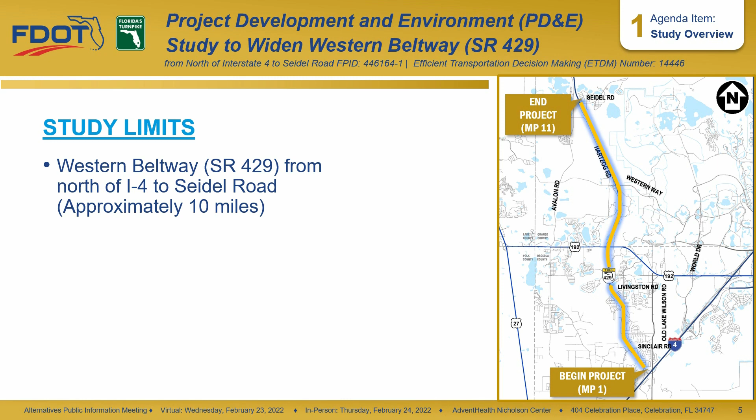The study limits extend from north of Interstate 4, milepost 1, to Seidel Road, milepost 11. The project is located within Osceola and Orange counties.

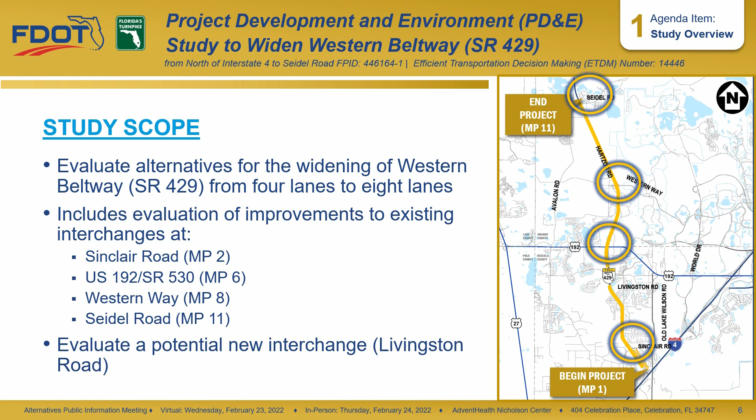The study scope includes evaluation of alternatives for the widening of Western Beltway from 4 lanes to 8 lanes, and evaluation of improvements to existing interchanges at Sinclair Road, US 192, Western Way, and Seidel Road. The study scope also includes evaluation of a potential new interchange, which is proposed at Livingston Road.

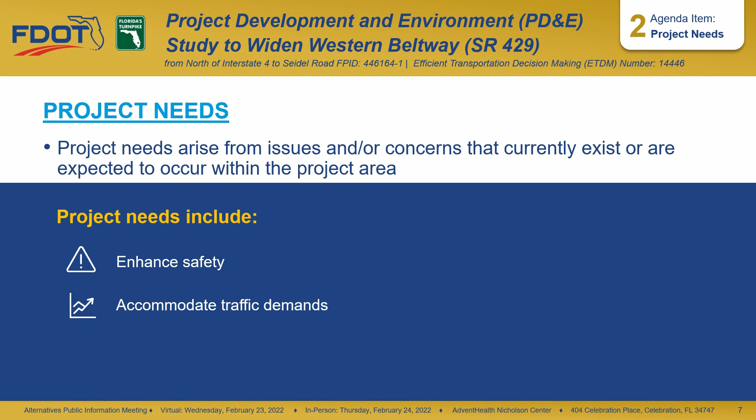Project needs arise from issues and concerns that may frequently slow down traffic, cause delays, or lead to accidents. The need to widen the Western Beltway is based on enhancing safety, accommodating travel demand through the year 2050, improving travel times and reliability, and enhancing economic viability, emergency responsiveness, and evacuation times.

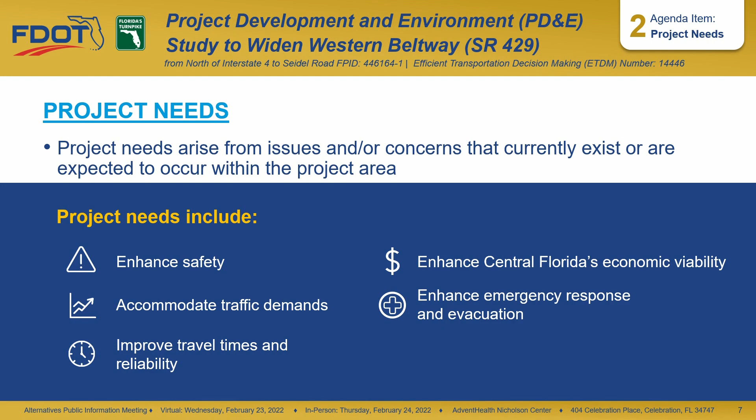Improvements to Western Beltway are needed to enhance safety. Between 2014 and 2018, there were 161 crashes within the study limits between the I-4 ramps and Seidel Road interchanges. The estimated economic crash cost is about $33 million over the 5 years.

Congestion is a major contributing factor to crashes. If nothing is done, congestion will continue to rise, leading to an increase in crashes.

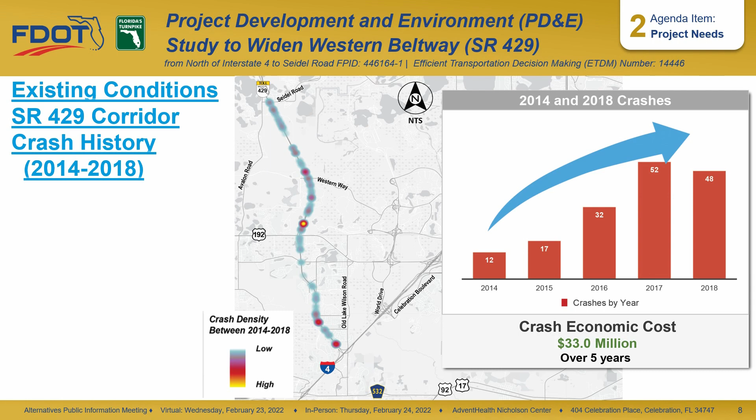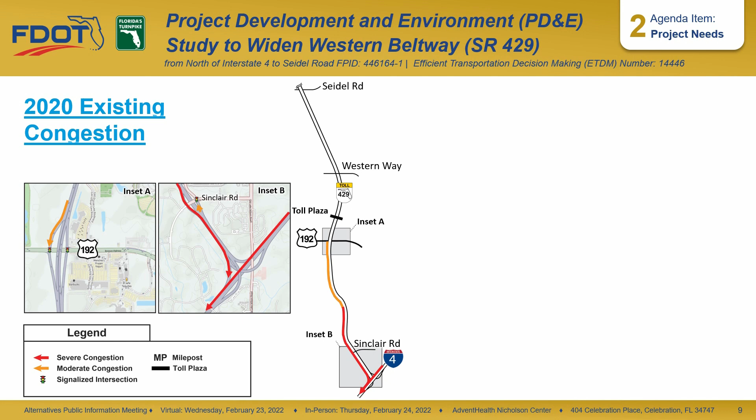The State Road 429 traffic has been increasing by more than 10% per year in the recent past years within the study limits. This can be attributed to the high increase in population and employment opportunities in the area, as well as recreational activities. During the evening commute, traffic backs up on State Road 429 in the southbound direction towards I-4, and long queues have been observed at the State Road 429 southbound off-ramp to US 192.

In order to accommodate future travel demand, 6 lanes are needed by 2030 and 8 lanes will be needed by 2045 for the segment between US 192 and Seidel Road, and between I-4 and US 192 by 2050.

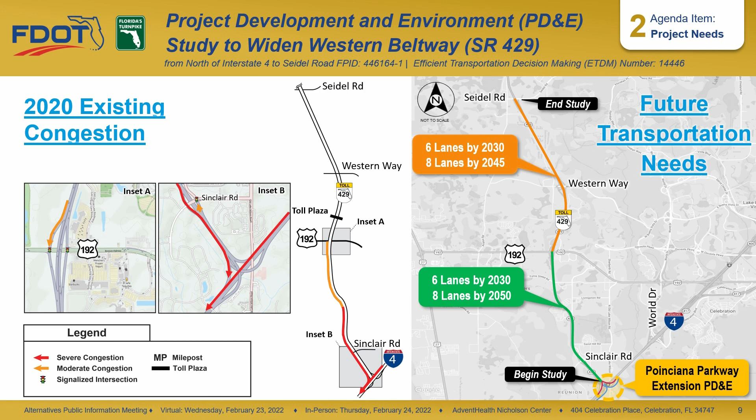The improvements considered as part of this study include both improvements to the main line and to the interchanges within the project limits, and also a planned connection to the Poinciana Parkway extension planned to the south as part of a separate study.

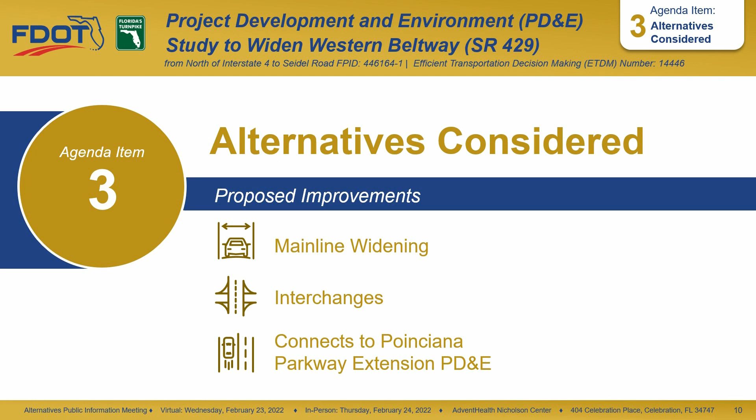In addition to widening the main line, proposed interchange improvements from south to north within the project limits include operational improvements at Sinclair Road, a new interchange at Livingston Road, operational improvements at US 192 and Western Way, and 2 options for interchange improvements at Seidel Road.

The no-build alternative will remain viable throughout the study. We will cover all of these proposed improvements in additional detail.

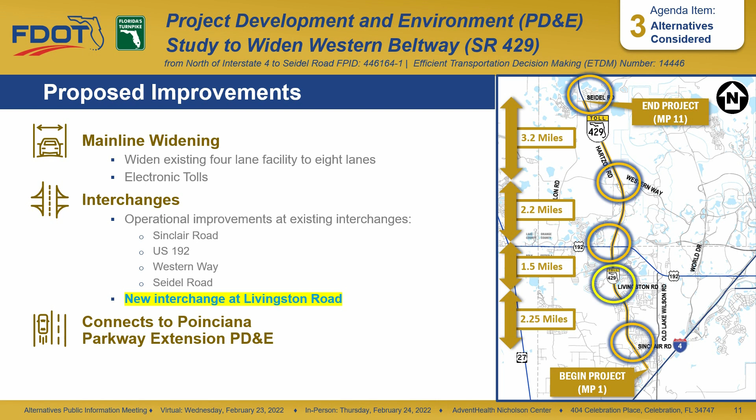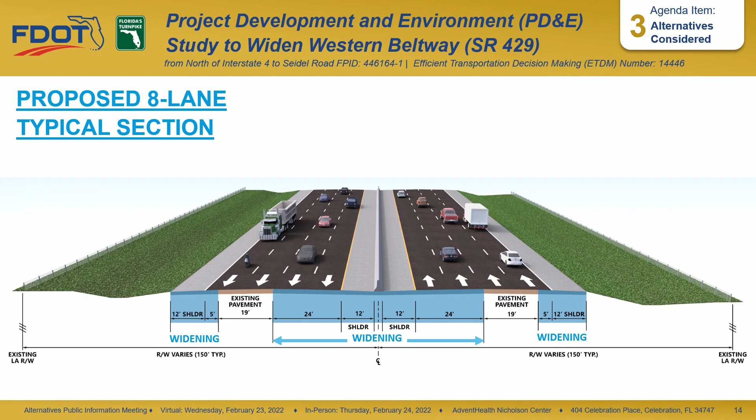Western Beltway will be widened from 4 lanes to 8 lanes throughout the project limits. This graphic shows the existing 4-lane typical section with a 64-foot median. The proposed mainline improvement widens the roadway to both sides. The proposed ultimate 8-lane typical section after widening to both sides includes 4 travel lanes in each direction.

Now, we will cover the interchange improvements from south to north, starting with the existing Sinclair Road interchange 1 mile north of I-4.

This presentation shows aerial views of the conceptual design of the proposed improvements, with north oriented to the right as shown. The legend shows the difference between existing and proposed signals shown on the aerial view.

This graphic shows where the project begins, at the first interchange at Sinclair Road. The Poinciana Parkway Extension PD&E Study includes improvements to the I-4 interchange and the Sinclair Road interchange.

If Poinciana is constructed, Western Beltway widening would interface with that project north of Sand Hill Road. However, if the Poinciana Parkway Extension project is not constructed, the Western Beltway widening would start further south at the I-4 ramps. The existing Sinclair Road Diamond interchange and the existing signal at the northbound off-ramp would remain.

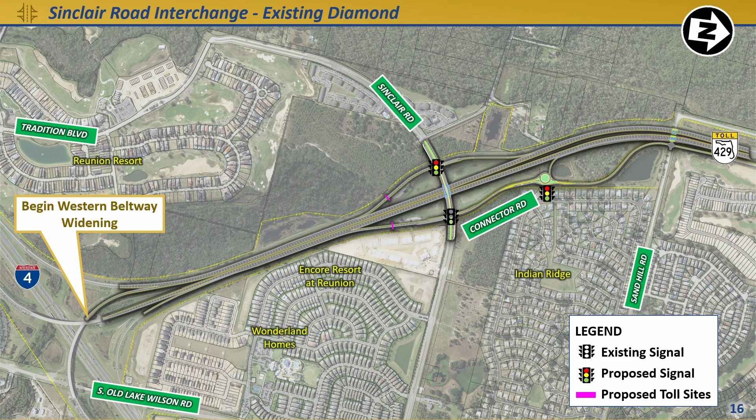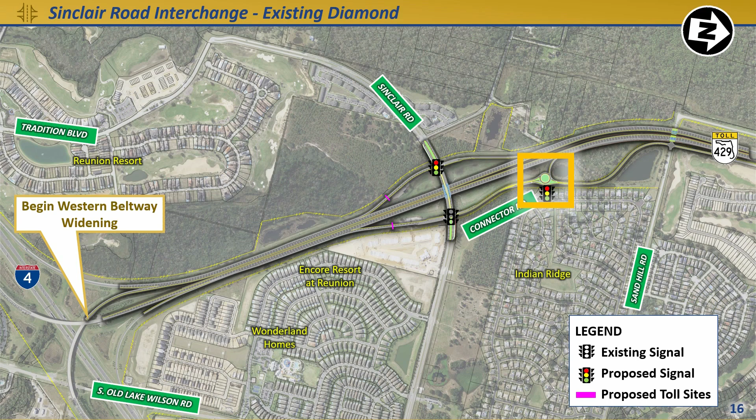We will take a closer look at these options. The first option is the signalization option, which adds a signal at the ramp terminal's intersection with Connector Road, as well as a turn lane in each direction.

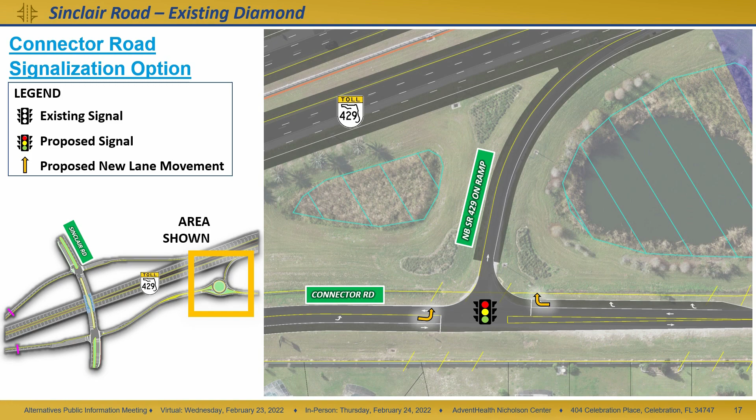The second option would be the addition of a roundabout at the same intersection instead of a traffic signal, to control all turning and through movements. The roundabout option shown offers the same movements as the signalization option.

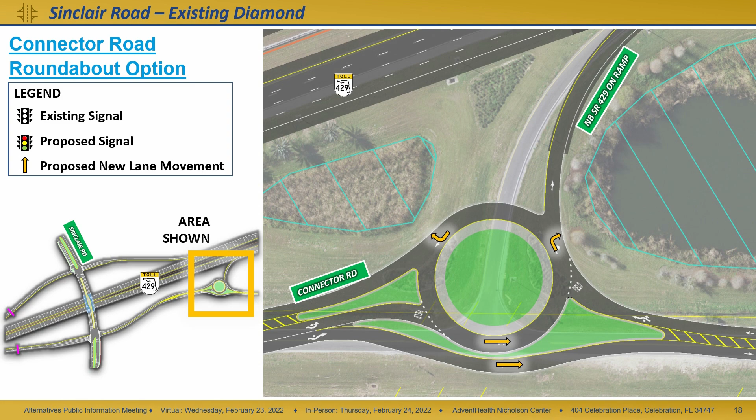Moving to the intersection of the ramp terminals and Connector Road at Sinclair Road, the existing signal would remain, but turn lanes would be added at 3 of the 4 intersection approaches.

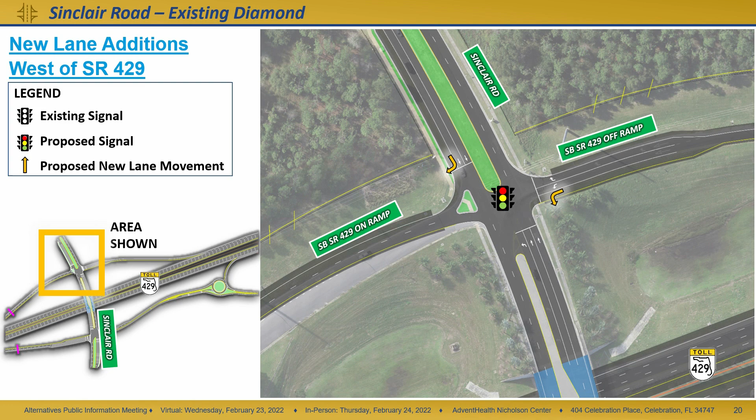Moving west of State Road 429, a new signal would be added at the ramp terminal intersection with Sinclair Road, as well as a right turn lane on Sinclair Road and a left turn lane at the southbound ramp terminal.

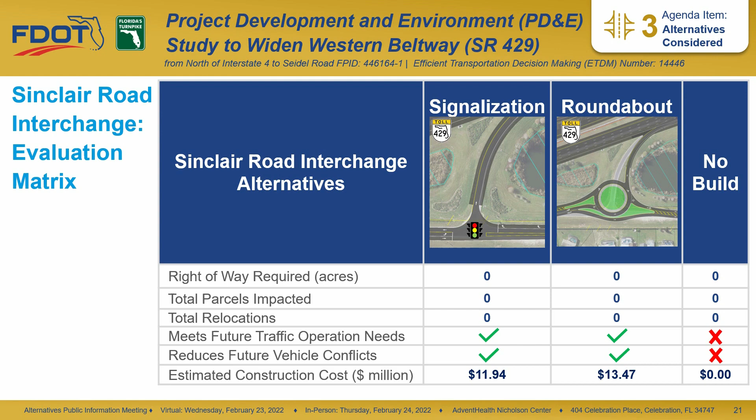The next interchange would be a new interchange located 2¼ miles north at an extension of Livingston Road. This new interchange will relieve US 192 and provide additional mobility in the study area.

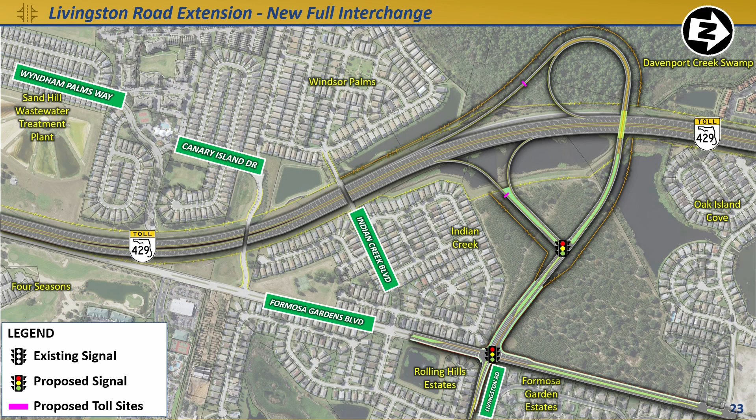The new Livingston Road interchange would offer full access between State Road 429 and an extension of Livingston Road, as shown. The new interchange would provide for all movements with loops to the south side as shown here. The ramps to and from the south would be tolled, with the exact location to be determined.

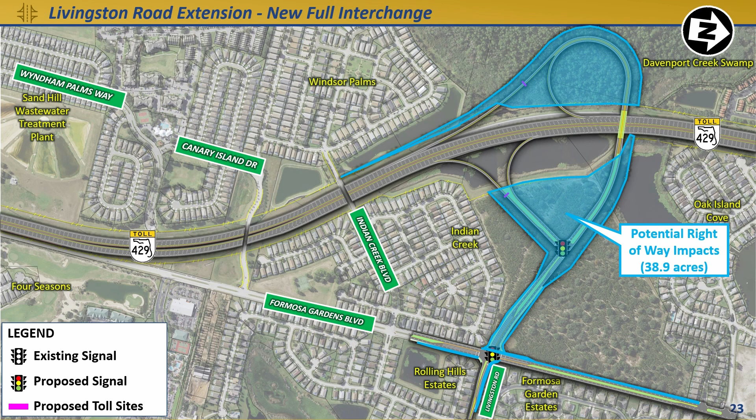We will take a closer look at the beginning of the proposed Livingston Road extension first. The extension of Livingston Road past Formosa Gardens Boulevard includes improvements to the intersection, including a new signal as well as additional turn and through lanes at every intersection approach.

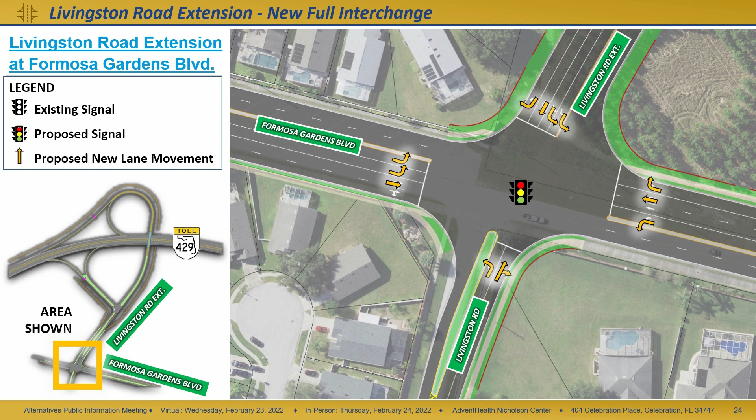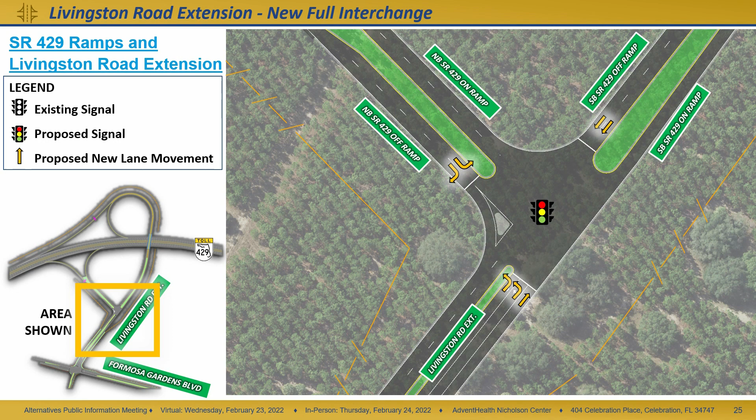The new T-intersection at the extension of Livingston Road and the State Road 429 ramp terminals would be signalized and include new movements at all approaches to grant access to State Road 429 northbound and southbound.

Modifications to the existing interchange at US 192 are also under consideration.

Modifications to the existing US 192 interchange include minor interchange improvements at the off-ramps, the addition of one eastbound lane on US 192 from west of the southbound ramp, and one westbound lane from East Orange Lake Boulevard to west of the southbound ramp terminal intersection. These improvements are generally within the existing right-of-way, but may require small amounts of right-of-way to be acquired.

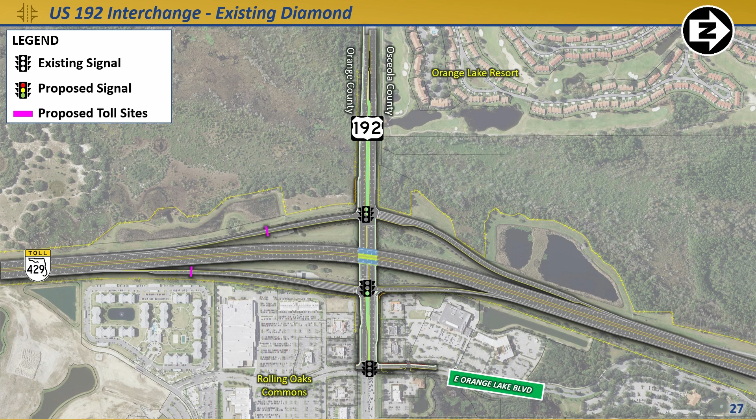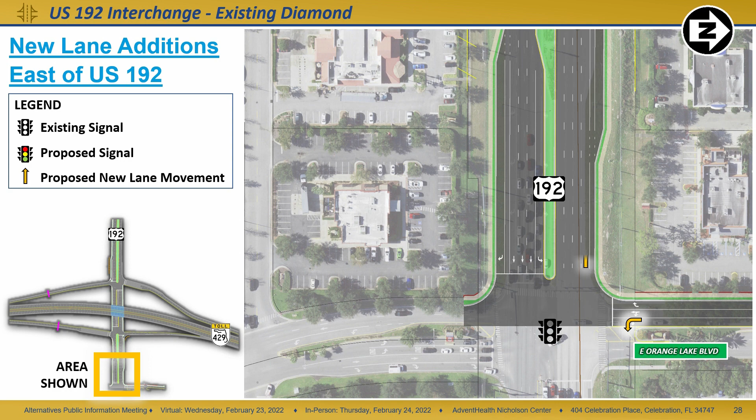We will take a closer look at the intersection improvements associated with the interchange, starting at East Orange Lake Boulevard. On East Orange Lake Boulevard, a new left turn lane would be added at US 192 at the existing signalized intersection, and a new through lane begins on US 192.

Moving along US 192, closer to State Road 429, an additional through lane would be added onto US 192 westbound. In addition, turn lanes would be added on US 192 and at the State Road 429 ramp terminal.

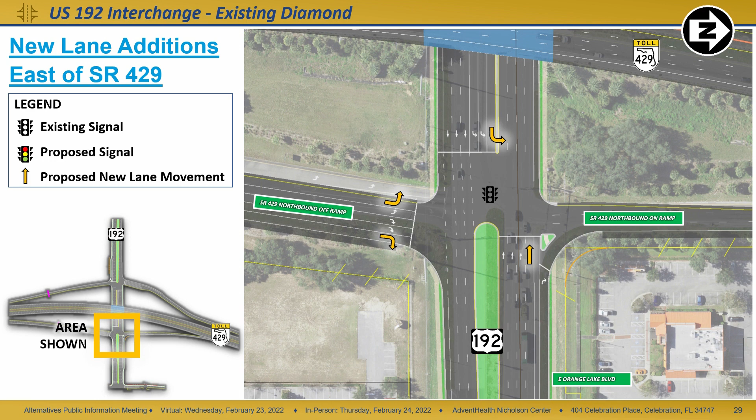East of State Road 429, an additional through lane would be added in each direction on US 192, along with additional turn lanes at the State Road 429 ramp terminal.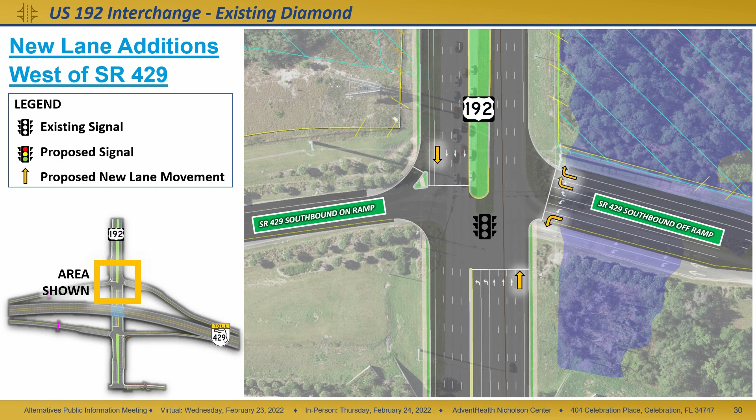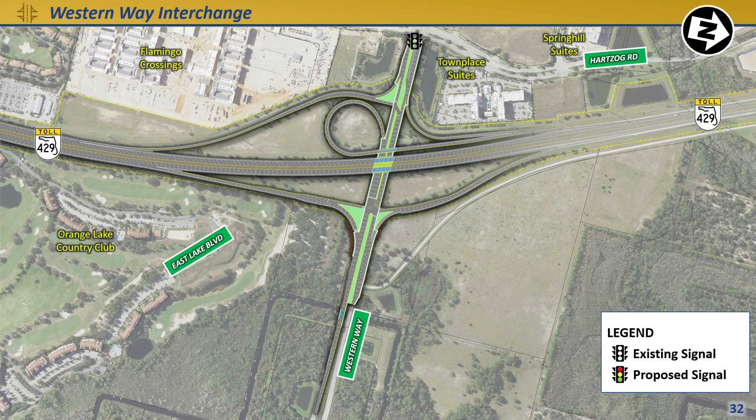Located 2.2 miles north, Western Way is the next interchange with modifications proposed. The proposed Western Way interchange is shown here. The main improvement at Western Way is the addition of a second lane to the southbound loop ramp as shown.

Other improvements include signals at the ramp terminals and additional turn lanes at both intersections. The improvements shown are generally within existing right-of-way, but may require a small amount of right-of-way to be acquired.

We will take a closer look at the intersection improvements on Western Way, starting at the ramp terminals east of State Road 429.

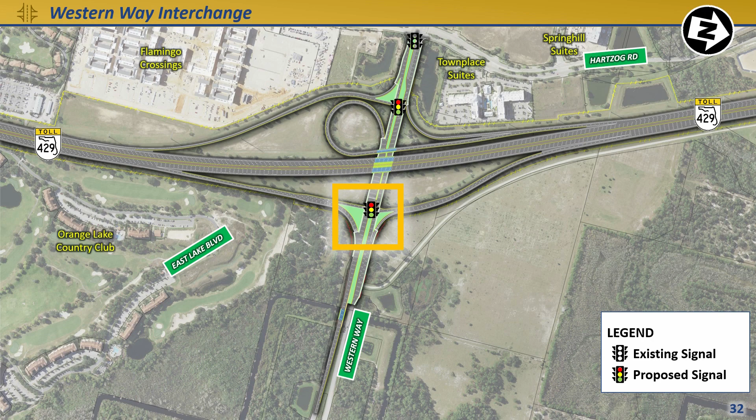Intersection improvements include a new signal as well as additional through lanes in each direction on Western Way. Additional turn lanes would be added at each intersection approach as shown.

Moving west of State Road 429, a signal would be added at the ramp terminal as well as an additional left turn lane accessing the State Road 429 southbound on-ramp.

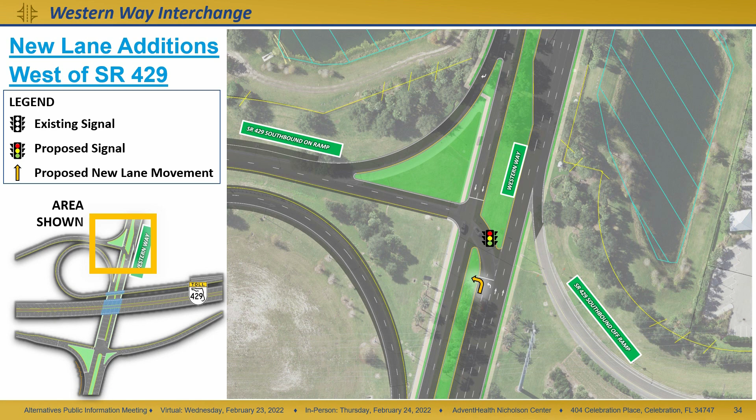The Seidel Road interchange, located 3.2 miles north of Western Way, is an existing interchange with proposed modifications. Two options for Seidel Road are under consideration.

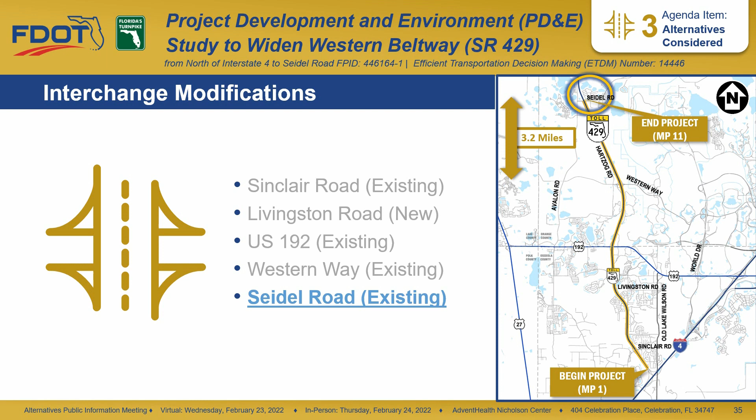Both Seidel Road options would include widening the existing State Road 429 bridges over Seidel Road and a second left turn lane added approaching Avalon Road.

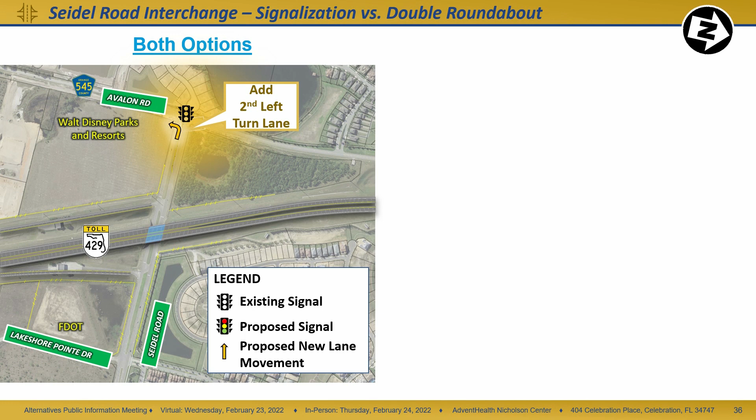The first option at Seidel Road is the signalization option, which includes the addition of signals at both ramps to control traffic movements. No additional right-of-way is required for the signalization option.

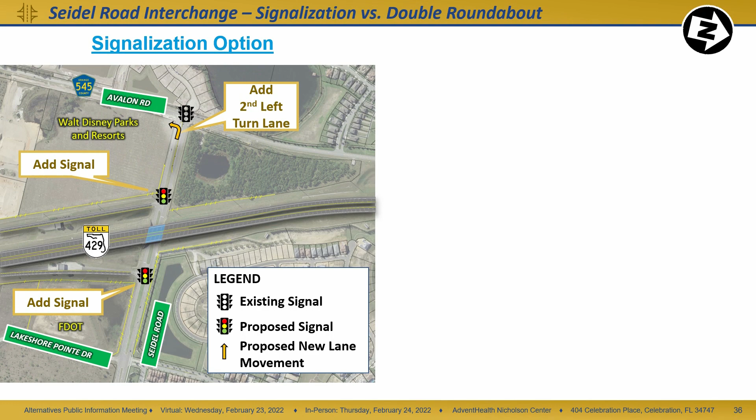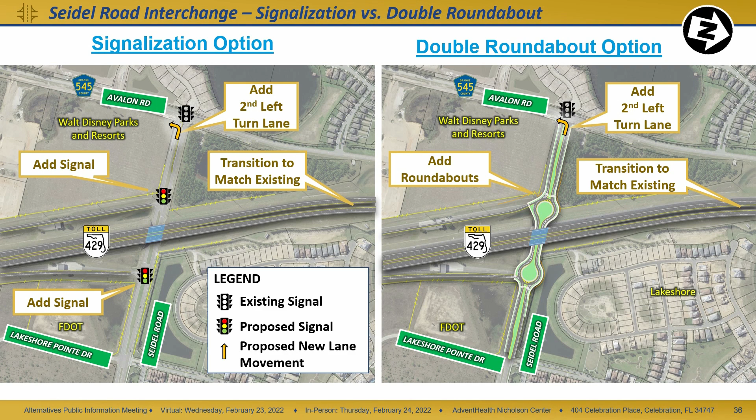For both alternatives, State Road 429 would transition to the existing configuration north of Seidel Road. The double roundabout option requires a total of 0.6 acres of additional right-of-way from 5 parcels.

The table shown is an evaluation matrix that compares the Seidel Road interchange alternatives. Both Seidel Road options have traffic and safety benefits that offer significant improvements over the no-build option. The signalization option offers these benefits at a slightly lower cost and with less impacts as compared to the double roundabout option.

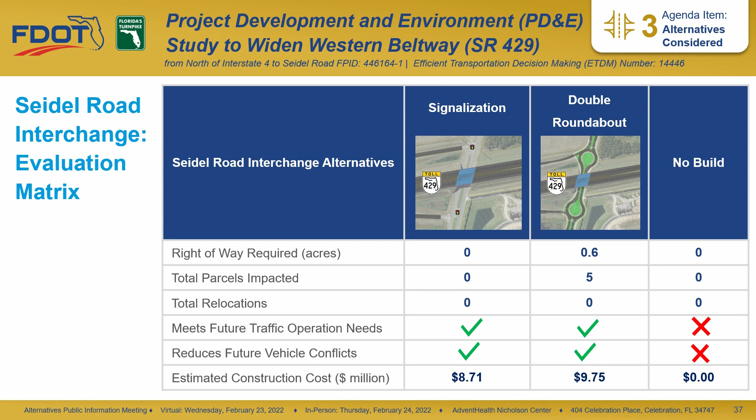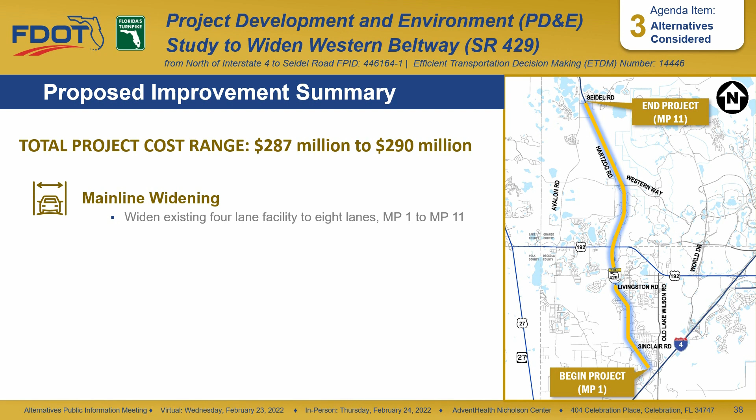The cost of the proposed improvements ranges from $287 million if the signalization options are selected at Sinclair Road and Seidel Road to $290 million if the roundabout options are selected at those locations. These costs include widening the State Road 429 main line within the project limits, the operational improvements described in this presentation at the interchanges shown, and the new interchange at the proposed Livingston Road extension.

As part of the study, Florida's Turnpike Enterprise is evaluating the potential social, natural, physical, and cultural effects of the project and of each alternative. Features listed are just some of the types of analysis included in this PD&E study. Avoidance or minimization of impacts to these features is a key consideration. Impacts that cannot be avoided will be mitigated.

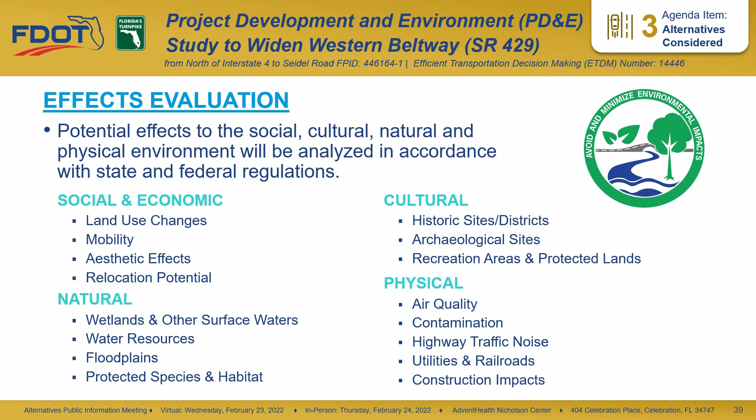Public involvement is a very important part of the PD&E study process. Various outreach methods will take place throughout the life of the PD&E study. 2 public meetings will be held for this study. Today's meeting, the Alternatives Public Information Meeting, is the first meeting for this study. The second meeting will be the public hearing.

In addition to the scheduled public meetings, other outreach methods include the distribution of newsletters, information posted to the project website, www.sr429i-4toseidel.com, and other meetings with stakeholders and small groups.

Throughout this study, Florida's Turnpike Enterprise will coordinate with the Central Florida Expressway Authority, the Reedy Creek Improvement District, Metro Plan Orlando, and Osceola and Orange counties.

After tonight's meeting, we will review public comments in conjunction with the social, cultural, environmental, and engineering factors to reach a recommendation on a preferred alternative. The preferred alternative will then be presented to you at the public hearing, tentatively scheduled for the end of this year. This study is expected to be completed by early 2023.

Please note that this schedule is subject to change and that subsequent project phases, including design, right-of-way, and construction, are not currently funded.

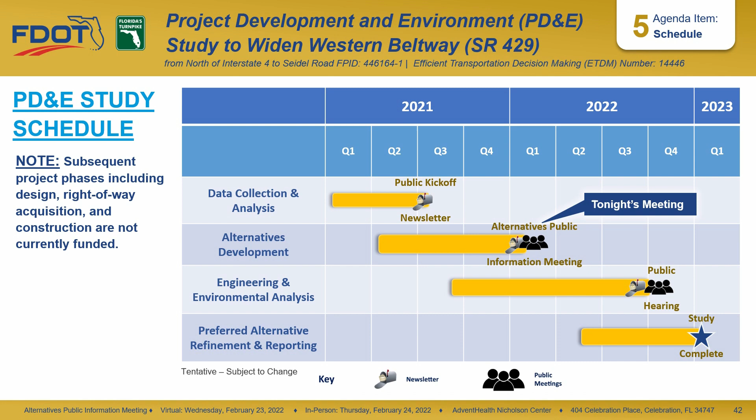Your comments are essential to this process and will help Florida's Turnpike Enterprise understand your concerns and suggestions for improvements. We encourage you to provide a written comment tonight, or, if you prefer, you may mail your comments or submit by email. All contact information is also included in the project handout.

You can also submit your comments directly through the project website. The website address is www.sr429i-4toseidel.com. We would appreciate your written comments by March 10th, 2022.

For more information, attendees of the virtual meeting can submit a question via the GoToWebinar question box or using one of the previously mentioned communication methods after the meeting. All attendees may also review the project information posted on the project website, which includes all the information presented at tonight's meeting. In-person attendees may ask questions to Turnpike representatives and review the aerial maps and other exhibits on display.

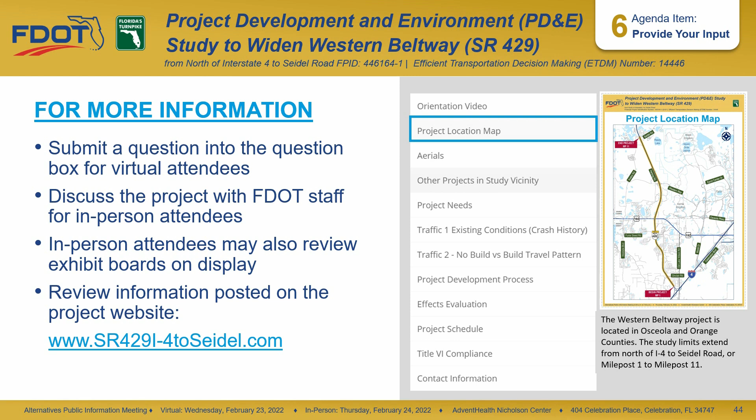After this meeting, if you would like to speak with someone, please contact one of the Turnpike representatives as noted in your handout.